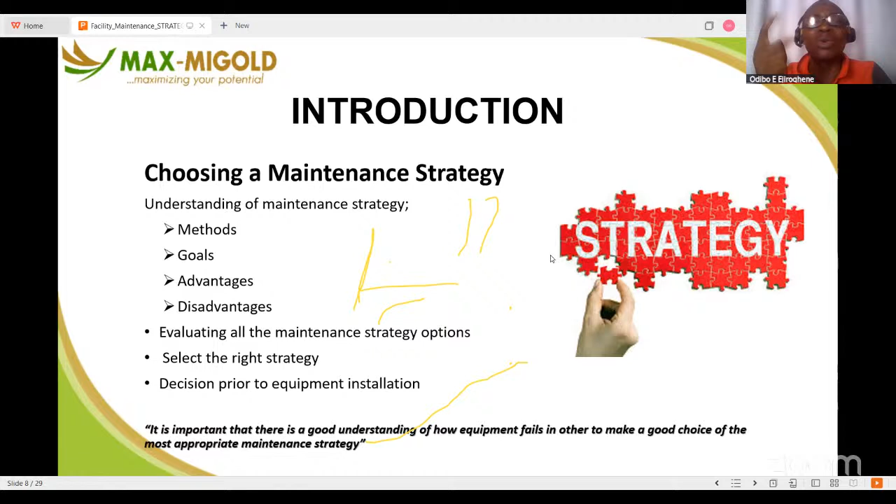You can be having a board meeting, a very strategic meeting, then one of your staff opens the door. The next thing everybody hears is a large sound. I pray that will not lead to a fire alarm, that people will start running and scatter within your building. So with our maintenance plan, we keep that in check.

So, criteria for choosing a maintenance plan. You need allocation of available resources. Resources could be in terms of human and in terms of finance. Sometimes when you want to adopt a maintenance, like I explained in my last class, you need to consider whether you are using in-house, whether you are outsourcing the maintenance plan, or you are using a combination of both.

There's no facility company I've seen in Nigeria that does all FM 100% with all their staff. You might have your staff handling some things where you have strength, and some others that are on O&M, operation and maintenance. There are some things you cannot handle, like a generator.

You bought a new generator from Cummins. Only Cummins sells the part. Only Cummins can fix it. Then you talk about CAT. Only they can do that. You can't say you want to employ one electrical engineer that just graduated to handle that asset. You will run that equipment to failure and your asset will go down the drain.

So what you do in that part as a strategy is to outsource those critical equipment. Critical equipment like the generator, your lift, a conveyor or escalator on your site. All those things can be outsourced. Then things that you can manage within your site, probably your air conditioning system on smaller units like your split unit, your standing unit. When you talk about a chiller system, you might want to adopt an outsourced process. So these are strategies when it comes to available resources.

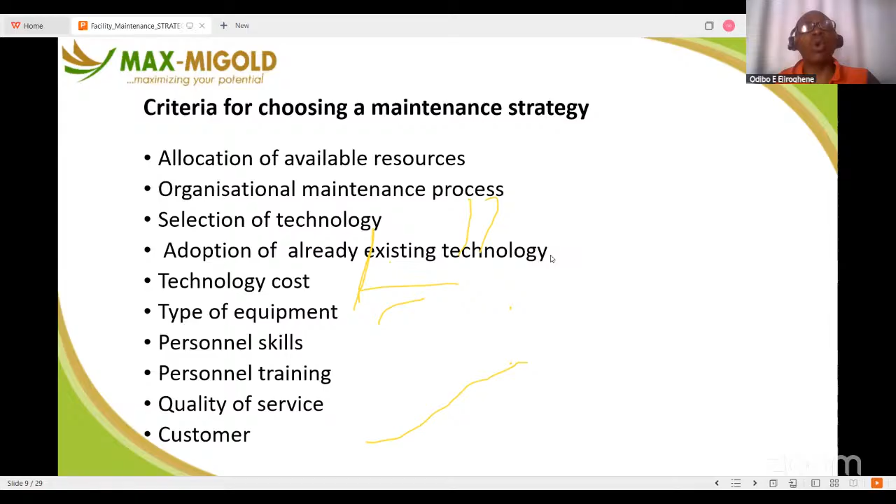What I've just mentioned to you are just strategies that you must adopt. You must consider all these key things before you decide whether you are towing the line of using employed staff, or towing the line of outsourcing, or towing the line of combining both resources.

Common challenges of maintenance strategies. What are the common challenges you have? Lack of understanding of maintenance strategy elements. All those elements we just mentioned, if I have not explained one or two things there, most of us do not know what those things actually represent.

And I can beat my chest that some of us in-house have technicians not trained. You bring somebody on board, you have not taught them how to use a multimeter. That could be a training for your team. Some of them might actually know how to use it, but not in the right format. You now need to teach them how to use it. Do you know that switching your multimeter to the wrong voltage and measuring for a high voltage can actually destroy that multimeter? Because your staff are not trained, they keep destroying your equipment that you bought with your hard-earned money. You understand? So as little as that, you need to put them through.

Your water treatment system, they need to know how it works. So that if there are issues, they can easily come back to you and say, sir, as you explained to us that time, we noticed water was coming out from this pump, we don't know what is leading to it. They will be your eye opener.

If an AC is dripping water, sometimes as an FM, you might not be able to cover 100% of your sites. But because you have trained your guys, you tell them once they notice this or notice that, they should inform you immediately. They become a tool in your hand to deliver quality service. So lack of understanding of maintenance strategy could be an element for you.

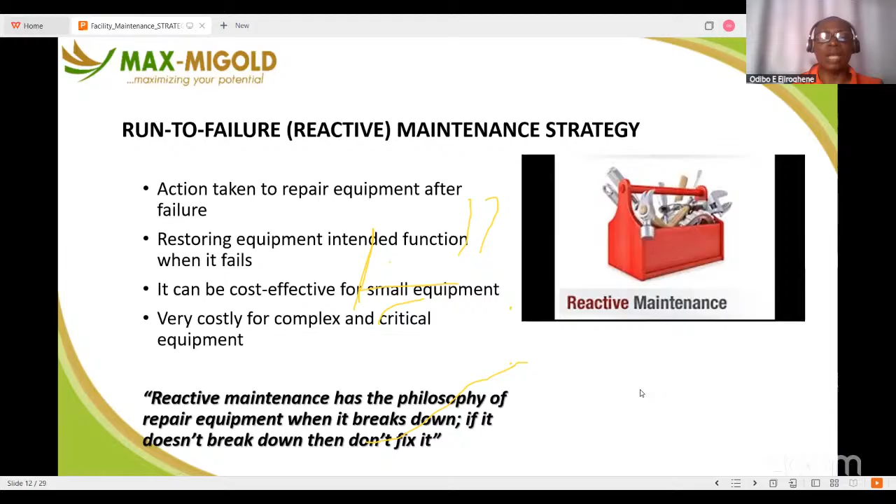So in order to curb this element of reactive maintenance, you respond to the fault call and identify the cause of the system failure. When it finally occurs on your site, first of all identify. How do you do that? If you have measuring equipment on site, your technician can actually do a report of what happened.

Your generator can actually shut down while in operation. You might want to check what happened. Sometimes it could be as a result of poor quality diesel. Some of us, if you check our diesel tank, either surface or underground, we haven't cleaned it for more than a year. So in the process of the generator taking up diesel, it has sucked up water or dirt, and that dirt could actually affect the functionality of the generator.

If your guy does not know how to troubleshoot, it could take you a whole day to know what has happened to your generator, and your vendor can actually rip you off.

So care must be taken to ensure everything that assists the functionality of a particular equipment on site is well taken care of. You might be taking good care of your generator, but don't forget, the quality of diesel supply can affect your generator, and lack of maintenance of your diesel tank could also affect it.

There are times you need to remove dirt from your diesel. There are equipment and companies that do that. If you don't have that, there are companies that wait till the diesel gets to the low part, then they pump the other one out.

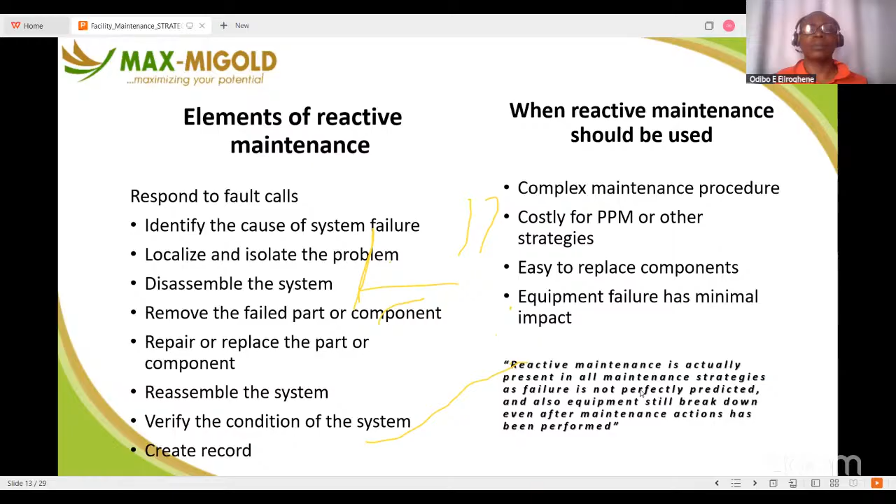What are the advantages of this? It requires minimum staff, and they are very cheap. Because when you outsource to some companies sometimes, what you buy in the market for about maybe 10,000 naira, the company might tell you it's 50,000 naira, and you don't have any option of replacing it - you have to depend on them. So those are the disadvantages.

But for reactive, you have the option of using your own guy to go to the market yourself and buy. But sometimes bigger companies might not want to use their staff because they will definitely put in 1 or 2 gains, and if the equipment does not work, who bears the risk? That's why we run most of these procurement things through our procurement process or to a registered vendor within your company. Then there's the little demand of maintenance - if there isn't much maintenance needed for a particular equipment, you can definitely use it. So don't forget that you must find what works for your site and adopt it.

Disadvantages: increase in labor cost. If the person you brought does not understand what reactive is all about, or you employ people because the guy is the cheaper option, because I've seen technicians being paid 50,000, some 80,000. The guy does not know the work. You just brought him off-site. It will cause you more harm than you can imagine.

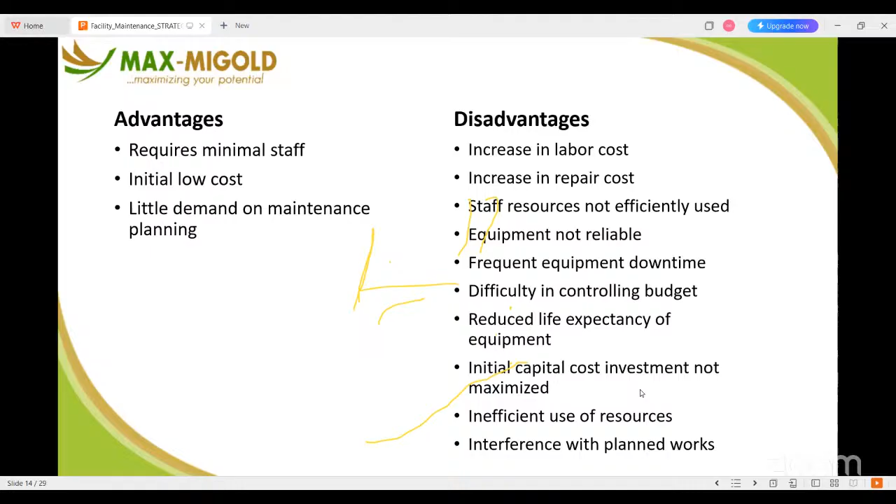Thanks. Okay, the next one on the agenda is preventive maintenance. This strategy noticed that if equipment works continuously, let's say you are running your AC 24 hours, 7 days a week, 1 month, 3 months, you've not shut it down one day, definitely the equipment will be faulty. So what it adopts is that periodically you stop work and maintain the equipment. That is what preventive maintenance does.

So maintenance performed at scheduled intervals. When I say scheduled interval, it could be monthly, it could be quarterly. Quarterly is 1/4 times 12, which gives you 3 months. And it could be biannual, 1/2 times 12, which gives you 6 months. And there are some that are annual, like a transformer. Some of us have transformers within our site. We don't know that transformers are subject to maintenance. They are subject to maintenance.

Maintenance performed irrespective of failure. Sometimes the equipment is working fine, there are no issues. But because it is planned to be done at intervals, you will have to stop that equipment and do your maintenance plan.

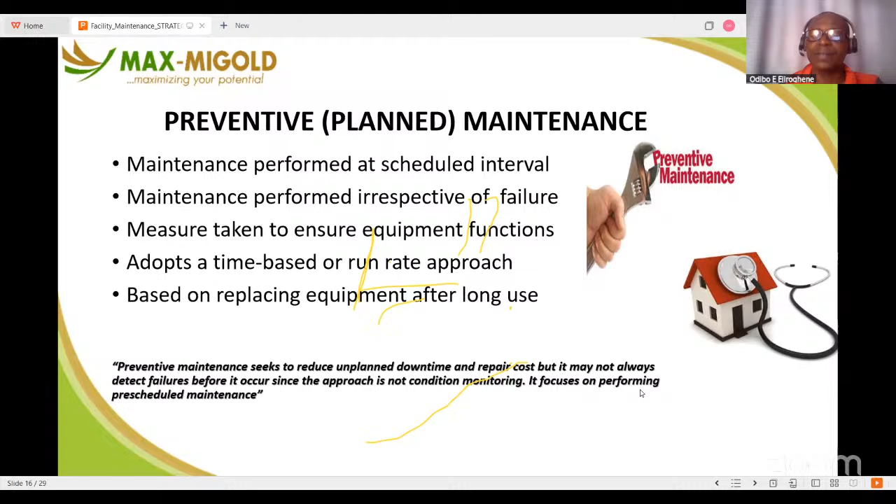Elements of preventive maintenance. If you are doing all these things, know that you are in this category as a facility manager. What are the categories? Component reliability. You must understand fully well the component reliability. How strong is your equipment? Then manufacturer specification. Sometimes you see an engineer or your team saying, Oga, this AC when you buy, we no like am. If you go buy next time, buy AC from Daikin, buy Carrier, and buy Panasonic. Panasonic strong. Because of that specification, you are justifying the quality of service you are going to get.

Because if you fail to buy the right equipment on site, then be ready for a lot of maintenance practice, a lot of repairs, and a lot of downtime. Don't buy equipment because it is cheap, and don't buy it because it is expensive. As an FM, you must marry quality with cost. That is the most efficient strategy to buy. And how do you checkmate if you want to buy? You use your procurement process, or you can use up to 3 vendors to ask how much a particular company charges. It can be maintenance of an equipment, it could be replacement of an equipment.

There's no vendor that will give you the same cost for a particular product. It's not possible unless they've talked among themselves. There must be cost disparities among all this. So it is now left for you to define what you actually want.

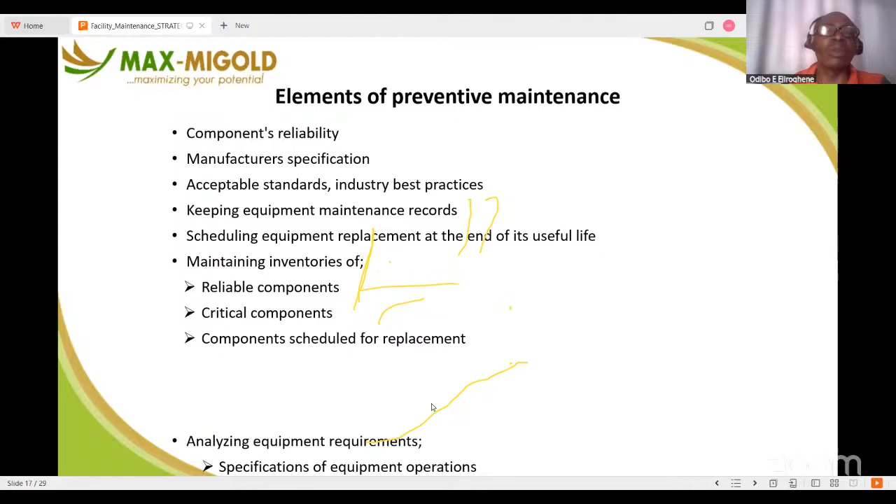There are some equipment that will tell you they have 2 years warranty. Some will give you 1 year. Some, because they are not too sure of their product, the warranty is cut to 6 months. Some are even 3 months. After the expiration of that 3 months, you cannot claim warranty on those products.

What are the advantages, if you adopt it? Reduced risk of unscheduled equipment failure, optimum performance of the equipment, reduced equipment downtime, fewer repair emergencies, lower unplanned equipment downtime, extended equipment useful life, keeping equipment in good working condition, keeping equipment safe, improvement in system reliability, decrease in cost of part replacement, better inventory management of spare parts.

Cost saving of about 12% to 18% compared to reactive. So if you adopt this, for those that monitor their annual budget, you'll be surprised you will make a lot of savings for your company for that year because you have adopted this strategy.

Like I said, it is time-based, as in you schedule intervals monthly, quarterly, biannually or annually. So look for what works for your site. Then disadvantages: higher demand of resources. Because you are doing a schedule for that equipment, despite it not giving signs of fault or signs that it will fail, you must still buy the things you need for your servicing. That's why in the long run, it might be expensive.

High maintenance cost. The maintenance cost is also high because you are following a schedule, like I've mentioned. No consideration given to technical condition. There are no critical areas that condition is given to. The manual said that we should maintain every 3 months, so we are maintaining every 3 months. There are some critical equipment you are not paying attention to.

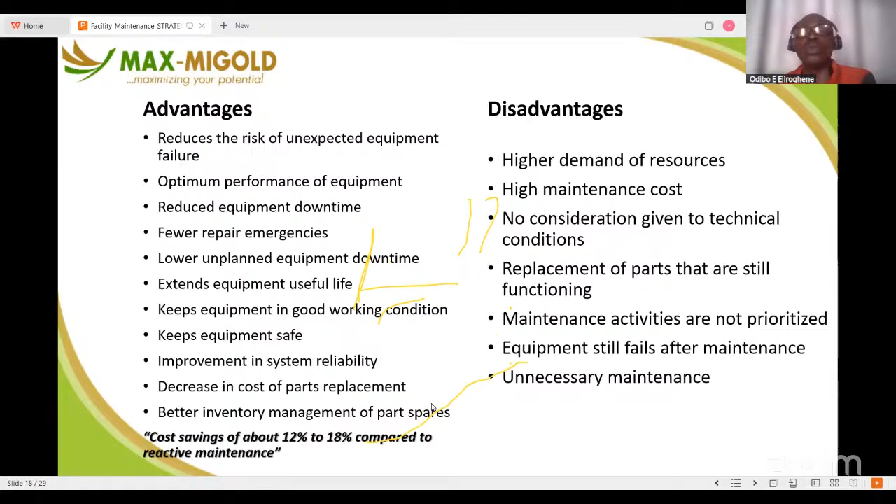Unnecessary maintenance. Sometimes when you finish maintaining, you discover that something has gone wrong because there's a particular mechanical equipment, tool or part that is actually leading to this. Your filters are giving way, or you see your filter cutting into two. There's something leading to it, but because you feel it is due, you maintain. So in the long run, it costs you a lot of money and a lot of resources.

Then we have what they call the predictive type. Under predictive maintenance, what do we do? Same as condition monitoring. Here you are monitoring every component, because you collect data. That data is fed into your system or into a provided gadget. That gadget plots a particular graph or pattern. If that pattern is normal according to the manufacturer's manual, there's no need to maintain.

You might be surprised if you use this process for your AC maintenance. Sometimes your AC might not actually need to be maintained every 3 months. It could actually be every 6 months. The person using the AC does not run the AC all through. Because of the nature of their health, of their body, they put their AC off all the time. So predictive will be able to identify that and save you costs in the long run.

Data-driven, suited for critical and complex equipment. You just bought one equipment for $1 million. You might not want to use the reactive approach: if the thing breaks down, we go fix it. Or every 3 months, we fix it. For this big equipment, you need to get data to check how the rotor is moving, to check the voltage within the system. You must check all those things before you put this equipment on.

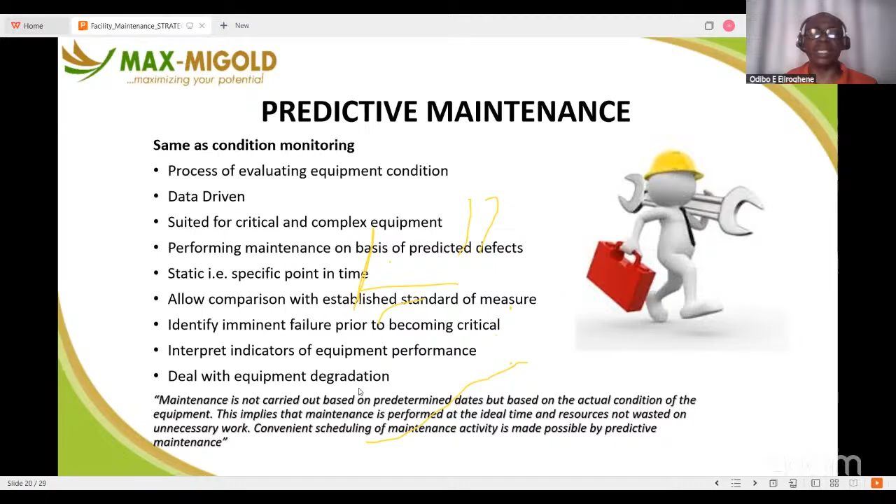But for a building, it could be your customer complaining about poor service. It could be your staff or your customer coming into the building complaining about noise from that particular equipment or something. Something could be used to determine that. But because you have data collected every morning, fed into a system, then you can actually predict what will happen in the end.

Type of predictive maintenance. What do we use to gauge predictive maintenance? Because for you to know that the oil within a generator has lost its viscosity. Viscosity is how thick a fluid is. You know, water flows easily. If you pour groundnut oil on the floor, it doesn't flow exactly like water. So that thickness of that fluid is what they call viscosity. So when you put oil in your generator or any moving equipment, over time, it loses that viscosity. That's why during maintenance, those things need to be replaced.

Because if the viscosity is too low, what happens? Mechanical components, two irons will rub themselves, there will be noise. Just your car, you have not serviced your car for a long time. What happens in the end? You start hearing some funny noise from your engine. Your engine can actually knock when there's no oil in it. Your radiator too, if there's no water, what happens? It can lead to overheating and it can lead to fire. And your car can go in that process.

So those sensor setups give us an idea of what is wrong. You get my point? So you need to ensure that sensors are well maintained and well positioned to give you direction of what is happening. Sometimes you need to measure, like with a multimeter. Because voltage, when you see an electric cable, you cannot know whether it has high voltage or low voltage, and you are forbidden to touch it. The only way you can know is to measure using what? Your protective equipment, your PPEs. Your guys must go to site and measure.

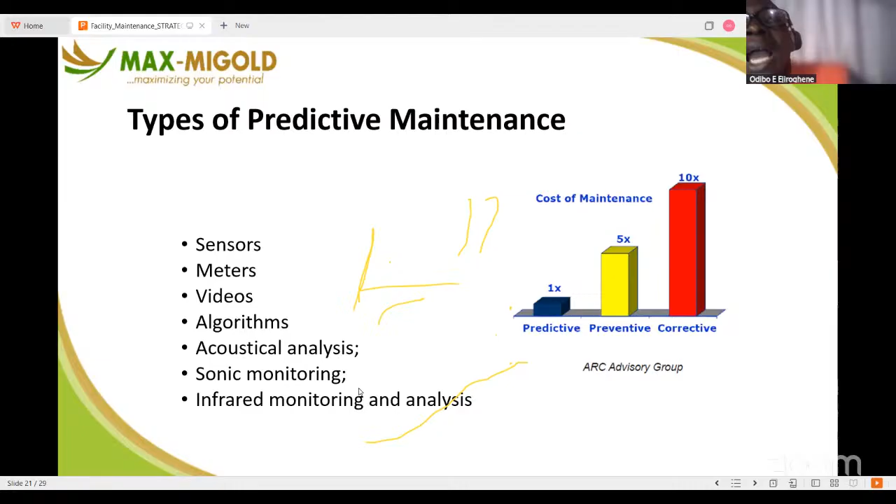Infrared monitoring is just like a display screen, you can watch it on YouTube. So what does it do? In your electrical panel, sometimes you see that some areas are heated while some areas are cooling down. Through this equipment, you can actually measure it. Once you turn on that infrared, it shows you areas that are stressed. Those stressed areas, if care is not taken, there's every possibility there could be a fire issue from your panel soon. Once you notice that, your electrical engineer knows what he needs to do to solve that problem. Vibration analysis - there are some equipment that vibrate while they are working. When you talk about thermography, some equipment's temperature actually shows that they are malfunctioning.

Then we talk about viscosity - I mentioned how thick your fluid is. So if your fluid is thick initially, over time of usage the viscosity loses strength and it flows exactly like water, it will not serve the purpose for which it was designed. You need to replace it.

Sensors, meters, videos, algorithms, acoustic analysis, sonic monitoring, infrared - all these things are things you need to adopt for predictive maintenance. Predictive maintenance does not always work on smaller buildings, because the cost of buying all this equipment is very high - very, very high. Some of them run into millions, just for one piece of equipment, and they need to be well taken care of.

But if you are working for a multinational, before you even ask, they are the ones that will buy those equipment for you. There's a particular gadget they use to detect gas in the air, because it is carried about by people that explore oil from the soil, from the earth. If the gas is much in the air, any strike of two pieces of iron can actually ignite fire. So that equipment gives them a signal to move out of the area before there's an accident. That particular equipment is very expensive - some of them run into 10 to 20 million for just one piece of equipment.

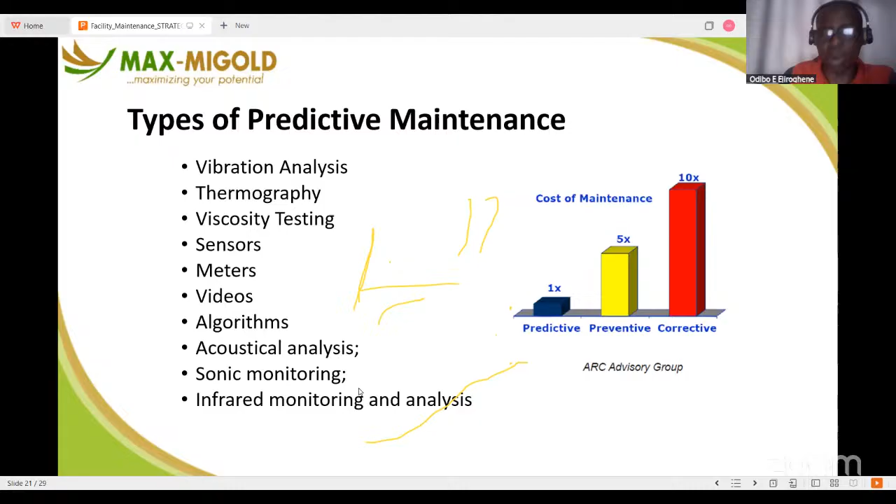So if you want to use that in your building, you know you are running your building down. So most FMs I've seen adopt planned preventive maintenance. But if you have the luxury, you can use a little predictive maintenance, putting into consideration all these things I have mentioned.

Why use predictive maintenance? Why do we need to use it? It allows planning and scheduling of corrective maintenance. It prevents unplanned failure of equipment. It reduces purchase of spare parts, because there's a deviation detected early, it reduces stocking too much. You reuse that equipment before that particular part totally fails - you can repair some equipment or some parts. It reduces maintenance cost, because once you notice that equipment is deviating and you're able to notice it on time and fix it, it reduces the cost of replacement. It improves maintenance planning, and increases system availability and reliability.

Maintenance is performed while equipment is in service, to eliminate or reduce service disruption and allow for early detection of a problem. Because you have things to aid your decision, it gives you a better view of what you need to do.

Take, for example, a doctor. If you go to a hospital, there's no way a doctor can look at your face and tell you your temperature is 34 or 36. It needs a device. If you want to check your heartbeat, it has a device. If they want to take your blood sample and see what is wrong in your system, you need a device.

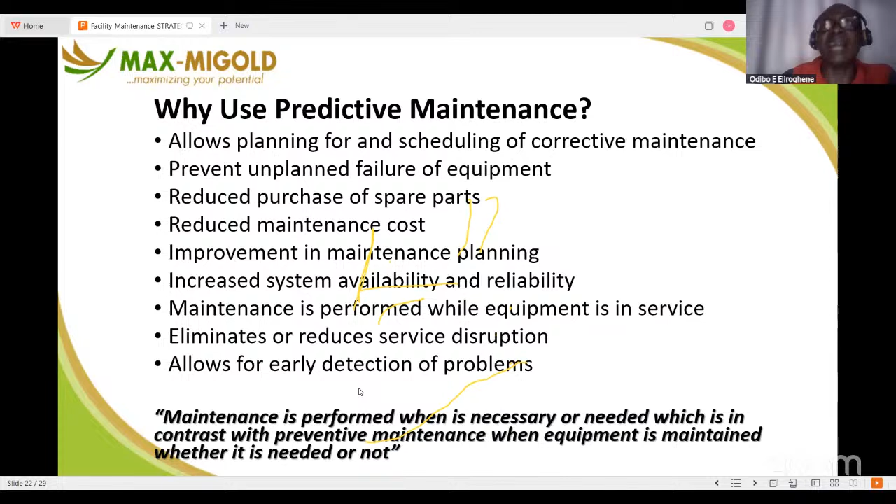Maintenance is performed when it is necessary or needed, which is in contrast with preventive maintenance, where equipment is maintained whether it is needed or not. Predictive maintenance can actually be done once a year, even if the equipment is running continuously, or once a month, or every quarter. What determines what you will do is the data you have input that shows you the direction.

Advantages: fewer breakdowns, reduced equipment downtime, increase in production, increased component operational life and availability. The equipment is readily available. It allows for preemptive corrective action, decrease in cost for parts and labor, better product quality, and improved worker and environmental safety.

Because you know what can happen and what can go wrong from the data you are fed, there's no need for you to be running helter-skelter to fix equipment that just broke down.

What are the disadvantages? High initial cost, because bringing equipment in, training your staff, bringing in an outsource company that knows about the equipment will initially be at a very high cost. Saving potential is not readily seen, because return on investment on this equipment can actually take beyond 5 years.

Sorry. Sorry. I just wanted to move this. Let me see if I can move it. Oh, I cannot move this. Can I? Okay, I can.

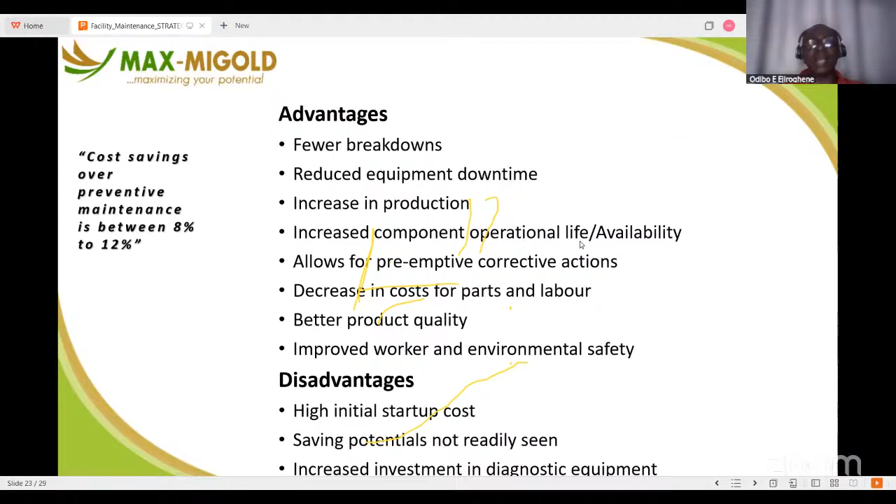So the other type of maintenance you need to consider is reliability-centered maintenance, RCM. This is the combination of any of these strategies together to ensure your site is running well. When we talk about reliability-centered maintenance, we mean a combination of more than one maintenance strategy. There are no sites that use 100% of one particular strategy. We actually apply reactive and predictive at some points, then sometimes we combine all.

What is our aim? Our site should not break down. Our equipment should run smoothly. Determine a system's maintenance requirement - you must know the requirement of your system.

Your generator every 200 hours, your AC quarterly maintenance, your lift every month, your water treatment system daily checks and periodic maintenance, replacement of the filter media and all components that need to be replaced. Your chemicals must be done when you see that they are depleting.

Then optimization of system maintainability - you optimize that equipment's ability to be maintained. Consider system component condition and its impact on overall system performance. Determine the most effective maintenance strategy, so you must sit down with your team and your management to determine which one works for you.

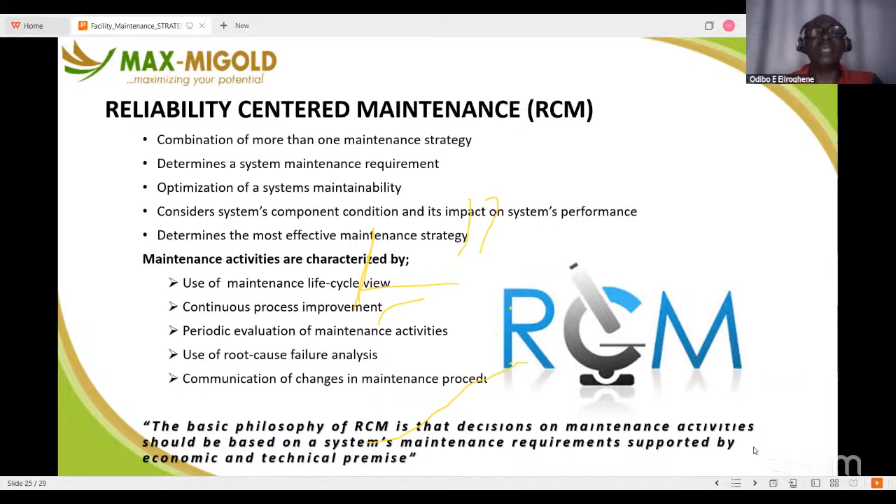The basic philosophy of RCM is that decisions on maintenance activities should be based on the system maintenance requirement, supported by economic and technical premise. So you can take that home and decide to adopt this for your site.

Reliability-centered maintenance is a framework that enables the definition of a complete maintenance regime. It ensures that the assets continue to do what their user requires in their present operating context. Don't forget, as I've defined asset in the past, an asset is something that gives you value, something that you can use to generate revenue. It could be your car, it could be Okada, it could be keke that you see on the road. Anything that generates revenue is an asset.

Then when it comes to your building, your lift, your AC, your swimming pool system, your water treatment system, the quality of services you give, those are things that actually determine your assets. The building is something that can generate revenue. There are some people that come into your building, if they see the color of your swimming pool, they will not do business with you, or they will not come into the building.

It's a systematic approach that evaluates a facility's equipment and resources to best mate the two, and results in a high degree of facility reliability and cost effectiveness. So what they are saying is that you might combine the two together and see which one works. You cannot totally remove one, but in combination you can ensure a particular thing is well maintained and used for its purpose, closely matching resources to need while improving reliability and decreasing cost. The purpose of combination is to increase the reliability of that particular equipment, thereby decreasing the cost you would have spent if you had not adopted the system.

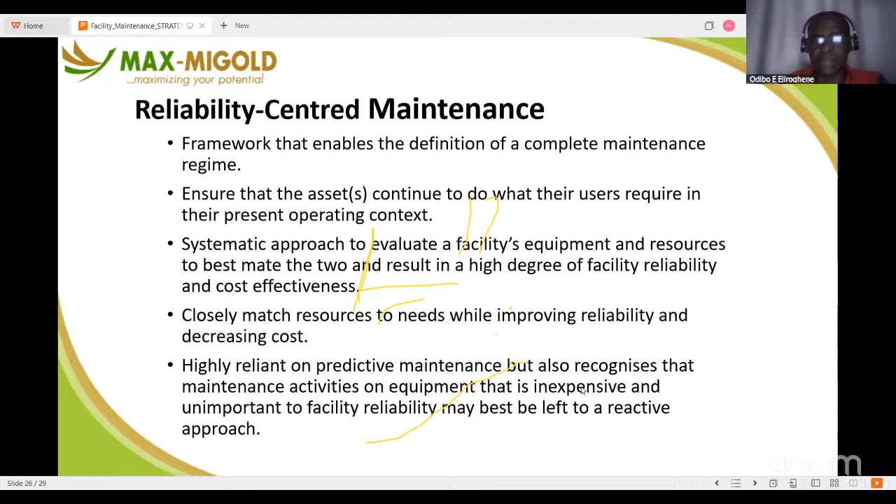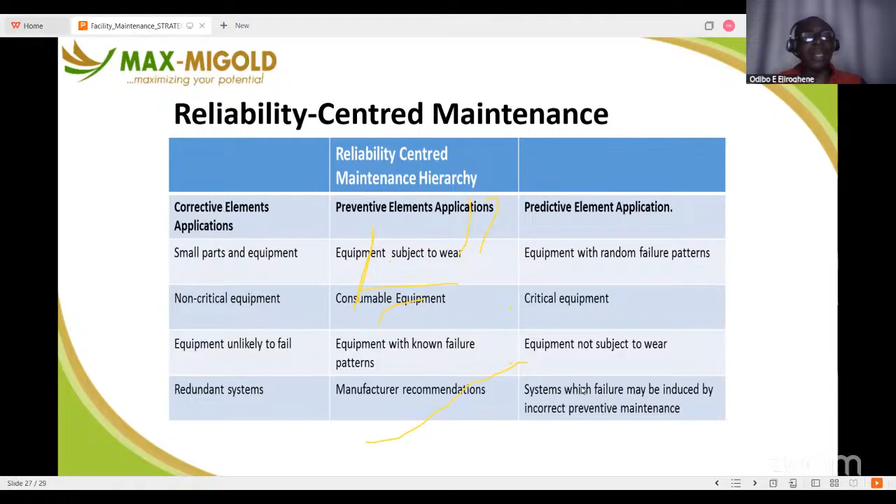There are some disadvantages in corrective maintenance that predictive takes care of. And there are disadvantages in preventive maintenance that your predictive maintenance takes care of. With a combination of all those things, reliability maintenance covers them all. Reliability centered maintenance, what do we look at?

What are the advantages? Cost of maintenance is reduced. Reliability and efficiency is guaranteed. Improve safety performance of this equipment. Eliminate unnecessary maintenance because you are combining all. Minimize frequency of overhaul. There are some factories that will tell you they want to overhaul, total shutdown.

Reduce probability of sudden failure. You will detect where there are problems. Incorporate root cause analysis, because you carry out a thorough investigation to see what led to this failure. You are able to put corrective measures in place to further reduce it. Reliability gives you that advantage.

Knowledge of the equipment condition. Because you have knowledge of the equipment condition, in a particular equipment you know which ones are reactive, the ones that are preventive within the same equipment, and the ones that are predictive. Data is vital for asset management, so any data you collect aids reliability. Focus on critical system components. Increase equipment availability on site. Okay, I think we are done with it.